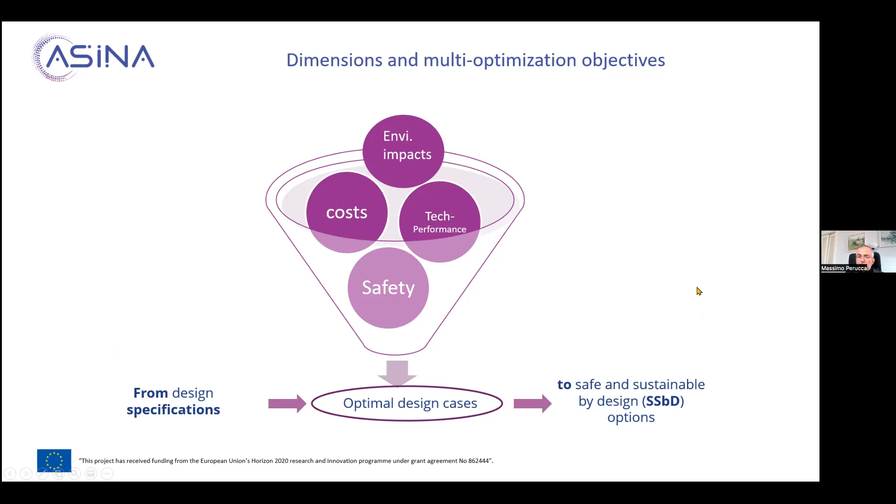As mentioned before, this is a quantitative-based decision support tool, and it addresses 4 dimensions: environmental impacts, costs (economic impacts), technical performance, and safety. By specifying the design requirements through this analysis and through the use of the DST, decision support tool, we are provided with a set of candidate solutions for safe and sustainable by design.

The ASINA Expert System can address different life cycle stages and possibly interconnect different life cycle stages throughout the life cycle of nanomaterials, from synthesis to incorporation, use phase, and end of life options to be considered. For each life cycle stage, a functional system is identified and defined, and within this functional system, key decision factors and key performance indicators are specified in advance, as we will see in a few moments.

So just to give you an overview of the general workflow and which kind of data are generated through the process: we have the life cycle phases. In this picture, we selected one of the possible phases, the incorporation phase, for instance.

This implies the modelization of the incorporation process, and identifying the variables in the recipe and in the processing units that will potentially impact different impact categories, which are related to different dimensions, like the environmental, economic, and safety dimensions.

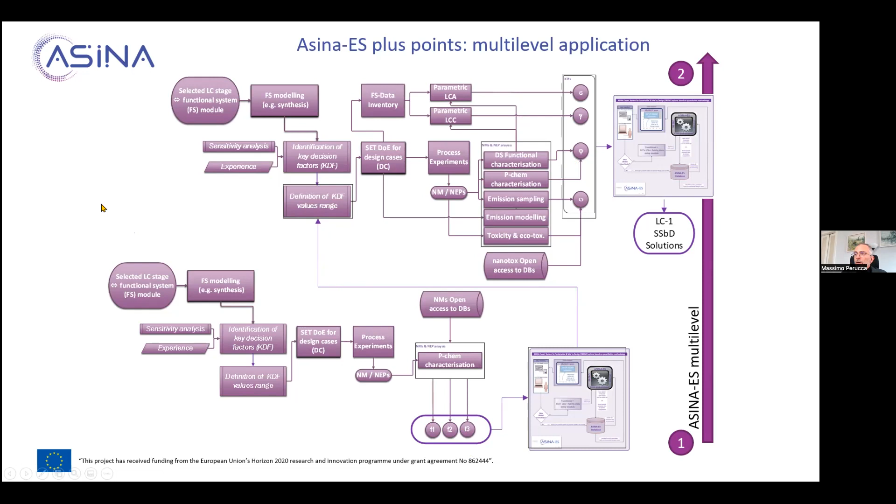And then this KPI here, it becomes a KDF in the next level of the expert system application. And then you can run the process as was detailed before until you get your KPIs.

Okay, this is just to visualize the workflow and to get closer to the final results. So let's recall the experimental data, virtual data provided, which are a reference to the same design of experiment matrix. This is very important to have harmonized data.

Pop it into the ASINA Expert System. What does the ASINA Expert System do? Well, in this simplified 2x2 case, yes, it's 2 KDF cases, you will get some curves in the decision space, which are connected to the performance space, okay?

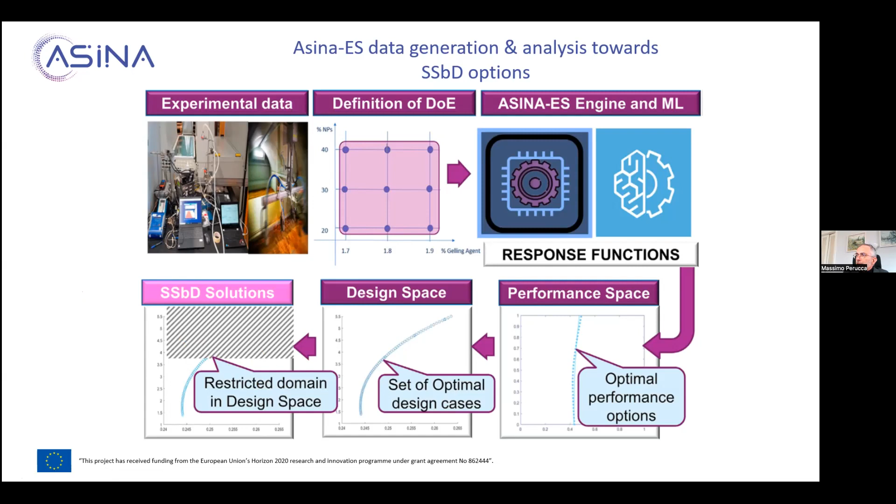And then we will get back to this domain restriction concept, but I don't want to put too many concepts on the table for the moment. Let's step to the second part, which is the main concept of the ASINA Expert System.

So I was referring to the decision space, so the KDF, key decision factors. Within the key decision factor phase, you have a DoE matrix, which allows you to somehow sample the decision space with real values and to get some functional approximation of decision space values.

Then you're measuring the performances of your space, of your samples, for instance, and these are values that are within the objective or performance space. The issue here is to find connections between any point of the decision space and any point of the performance space. Okay, this is quite relevant because,

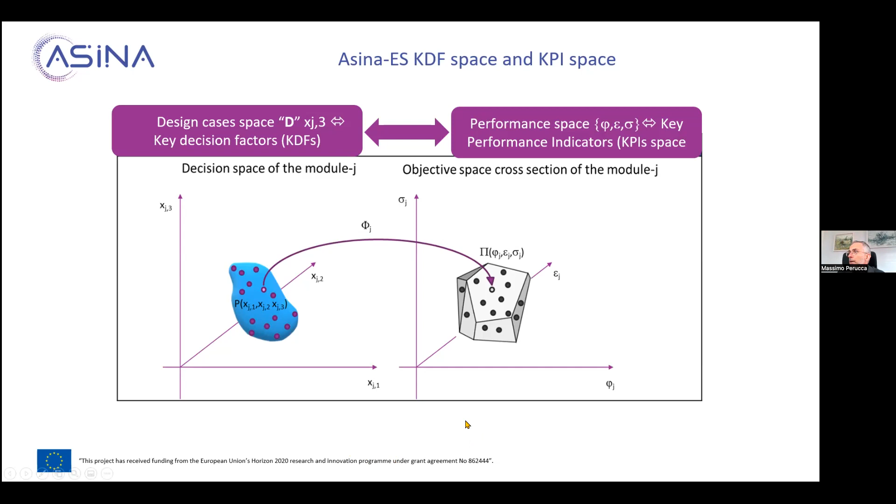by doing so, you can have a lot of information helping in the decision-making process. We will see how in a moment. Okay, I don't want to enter into this workflow, which is a little bit complex, but just want to give

you clear information that the data verification, so the fair data provision, will be an enabling factor to feed data to the ASINA Expert System database. And only by this data could be analyzed. So this is a kind of filtering and harmonization process before, which is somehow necessary in order to assure reliability of the obtained solutions. Let's proceed on that.

Then this slide provides one of the first methodological attempts to address the safety KPIs.

So to somehow assure that whatever will be the selection of the key decision factors, we will end up with a safe solution. This is a nice perspective and methodology, but sometimes it's lacking of metrics and indications in terms of standards. So if we would be able to identify a threshold for the safety level, like cytotoxicity or oxidative stress level, we could say that if we are beyond that threshold, we have to reject any kind of design option. That would be nice, and this was the first attempt to address the safety factors, but sometimes it's not applicable because this threshold is not available, and no one has enough indications to define the threshold level.

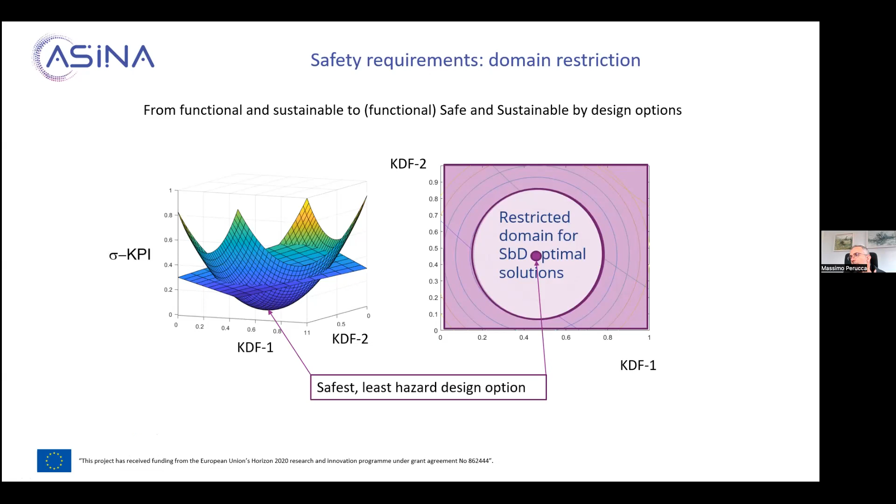May I go on? I think yes, you can go on. Okay, maybe just a note, in case of question you can also write them in the chat and I will read it for you if you need. Thank you, Federica, for monitoring this so that you can stop me anytime, okay?

So let's see briefly the technical workflow, not the data workflow and the data flow, but how to use the ASINA Expert System. So we need, of course, an engine, as we mentioned before. The engine is the implementation of the multi-objective optimization problem algorithm, and you need a user interface, and you need a database to store data, which may be results or input data that you generate from the outer world.

Important to say that when you open your area in the platform, you are allowed to indicate if you are working with a new case study or if you want to recall a previous case study analyzed. A previous case study may be partial, because maybe you just addressed some PChem KPIs without considering any environmental or cost impacts that are now available. So you can also include those data into the case study in order to have a comprehensive analysis of the safe and sustainable by design solutions you want to obtain.

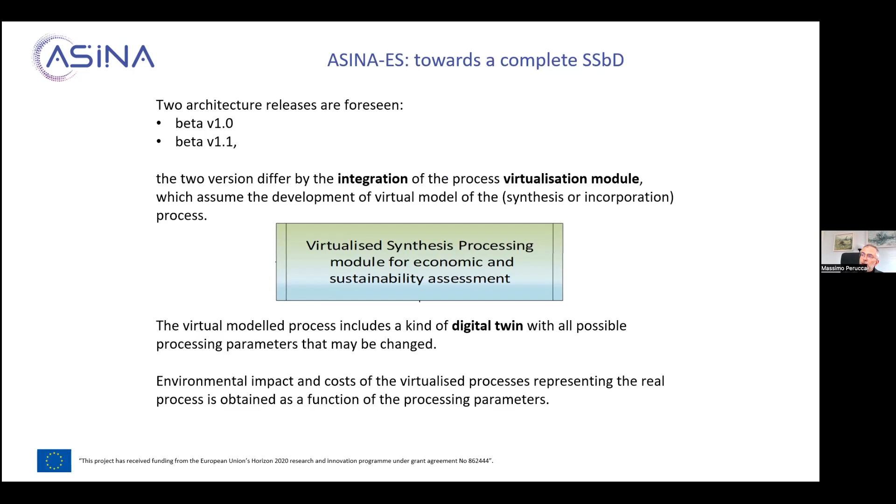So having a system in which, by definition of the functional system and process, whether it is synthesis or incorporation process of any kind, you can specify your design of experiment matrix and obtain sustainability, economic and environmental sustainability outcomes in terms of KPIs. And this is attained by, of course, running the standard lifecycle costing and lifecycle assessment analysis.

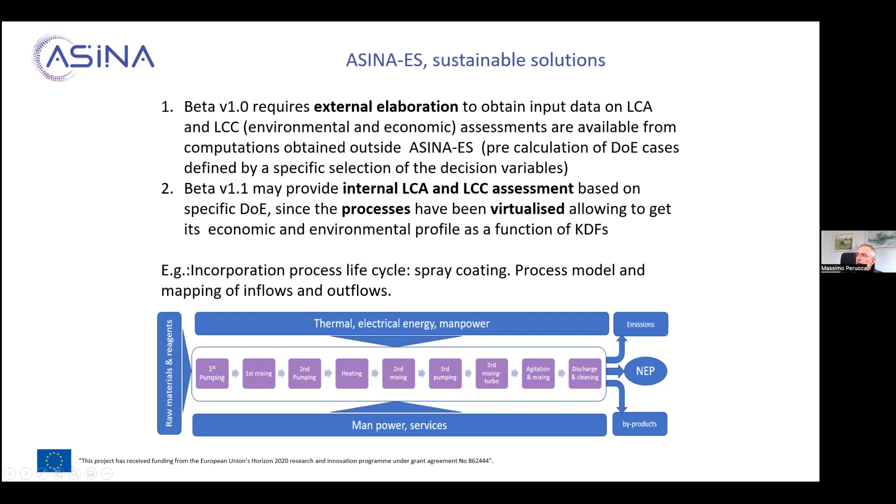Through the process itself, so here we provided an example of the different steps that are implied in a process, which is a process applied in cosmetic nanomaterials incorporation. All sampling of the process is done, and recipe parameters are input into the design of experiment matrix, and you can get the LCA and LCC process through a virtualized analysis.

This is the workflow of the ASINA Expert System in detail. As we were commenting in the first version, we had the virtualized synthesis external to the ASINA Expert System. And then we could select as a first step when recalling the ASINA Expert System which kind of situation we are in.

The situation is defined by the amount of key decision factors and amount of key performance indicators we want to consider. Then we have the input module, which will allow us to input data either by popping data in one by one or by uploading through a template.

Then we have a pre-normalization module. We generate the response function and we normalize again. And then we run the kernel, so the multi-criteria decision analysis task, which is the multi-objective optimization problem solving.

And we are able to interconnect decision and performance spaces and run the back conversion module, which allows us to start from the performance levels. This module allows us to get the key decision factors connected to those performances we want to address as safe and sustainable by design cases.

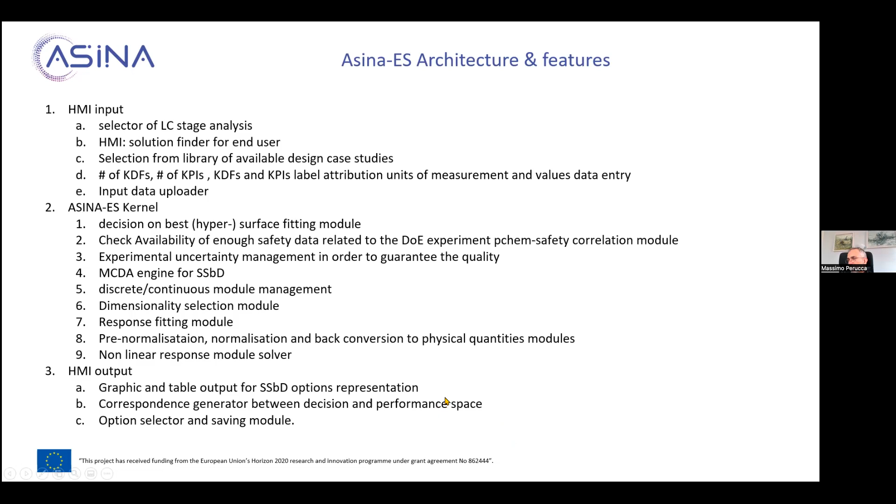Then we have graphic outputs, and we have some options in selection and saving modes of data, like a table mode or graphic mode, and we have outputs to be printed.

This is the first page in the platform that you are shown when starting an analysis, and you see that you can select synthesis, use, and incorporation or end-of-life solutions. So the use case definition - you can recall available use cases, you can define a new case study, etc.

This is - but I don't spend too much time on this - you will see it in the movie.

This is the new interface that we recently developed for data input, in which you see here 2 columns related to 2 KDF and 2 columns for the 2 KPIs, just to simplify and exemplify the situation.

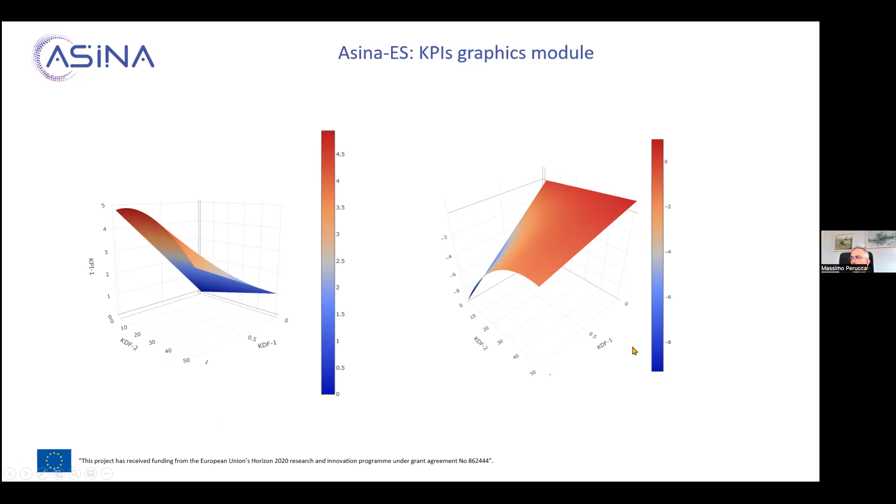And these are the kind of outputs that you are able to obtain after the ASINA Expert System interpolation model produces them. So you have a visual output on how things go when you are selecting some values of the KDF for different, of course, KPIs.

I think we can go through a user experience. I would like to show you a movie that will visualize better what I was trying to explain in a more technical language. Is there any questions so far before starting with this part?

No, I see that Federica is not stopping me, so let me try to make the movie link work. Okay, I have to move, sorry. Did you see it here?

Yes, okay great. So this is the first screen to log into the platform, and then we cut the movie, of course it was too long. This is the list of available analysis. You define a case name, the design case description, and textual data.

You of course have to provide the date of the analysis, and you can work with different variables. In this case we have 2 or 3 variables as a selection per case. These are the KDF, which I was mentioning before, and you may have different key performance indicators. Now we show up to 5, but it's basically an indefinite number of KPIs we can have.

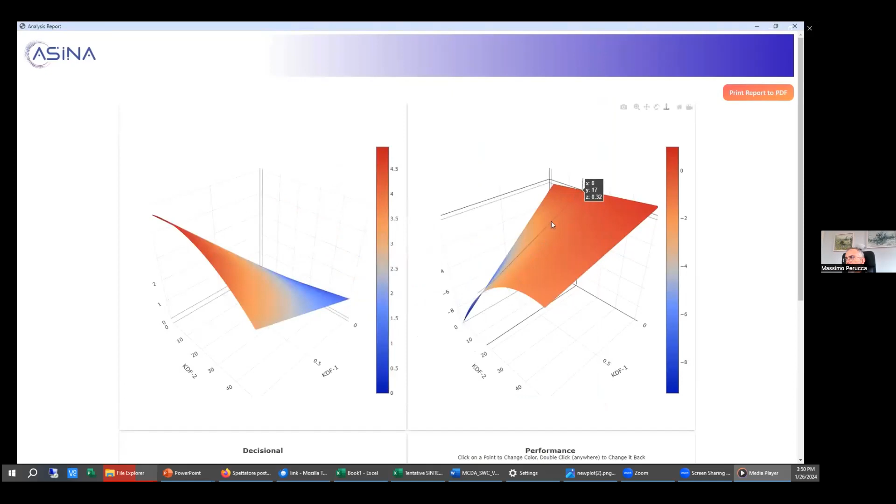You see here that, yeah, this was a screenshot, so you can use this for reporting, for instance - it's quite useful. And the same is for the second KPI shown.

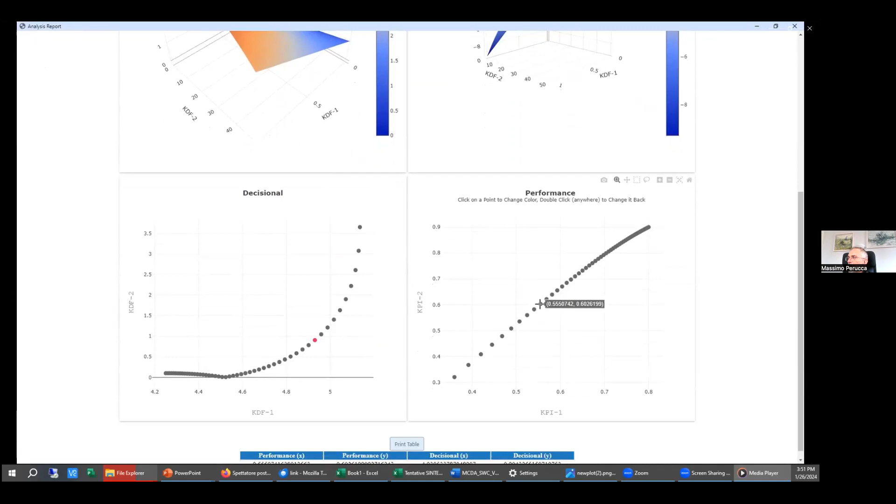But here, look at this - now the decision maker selects one point. This is interesting for KPI 1 and 2, and you see that the red point was found. These are the interconnections.

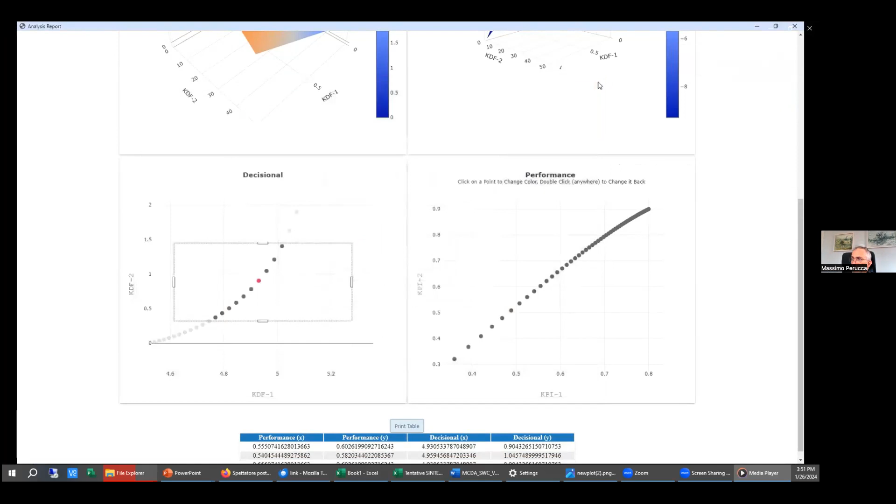So the closest point provides the KDFs, which will provide you the decisional values, defined as X and Y. So you have a table. By selecting points in the performance space, you will be given back the recipe of the synthesis or incorporation process you need to perform to get the expected key performances. The decision maker investigates the space and makes considerations by maximizing or accepting levels of KPIs which are compliant with the design specifications.

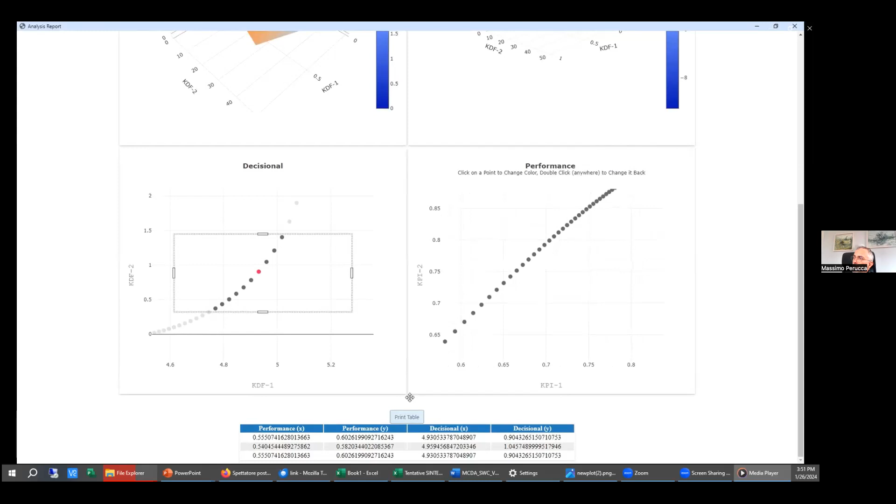What I was mentioning before, if you imagine KPI number 2 as a safety parameter, if you have a threshold that identifies the level which you cannot exceed, that could be the right information on what are the viable safe-by-design cases the decision maker can select. But most of the times this threshold is not available, so the decision maker has to minimize as much as possible these safety impacts.

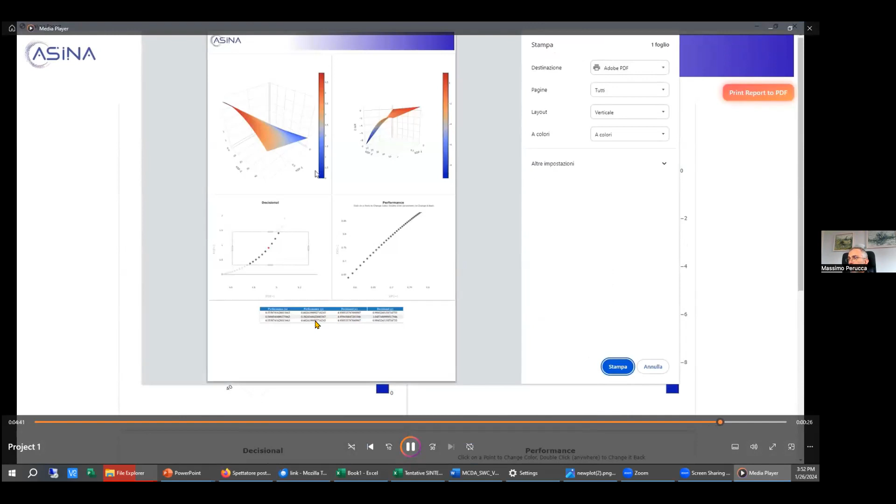You can print a report after making your analysis, and you have here the table of the selected points and the KPIs shown in detail. This is the value, and you can either select table mode or graphic mode to have a printout. This is just for user experience.

So now I want to show you, if possible, another movie. Let me check if I'm able to find it. It was a quite fresh movie, so I'm looking at it for the first time as well. Let me check. Should be here, sorry, I have many screens open, I have to navigate in this messy monitor. Oh, here it is, it was hidden. So I have another movie here. Let's see. No, this is the old one, sorry. Maybe this is the one. Oh, I don't know which one. Sorry, I have to go a bit further. No, it was the right one. Sorry. Yeah, it should be the right one. So I skipped the first part.

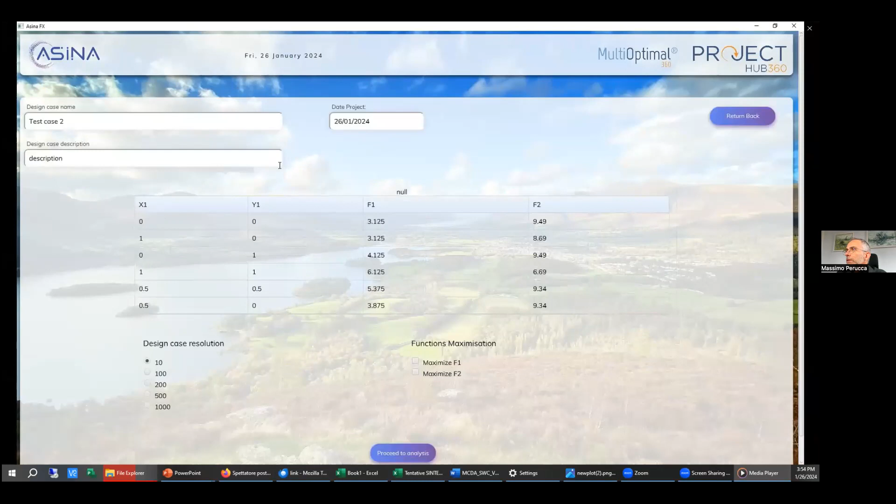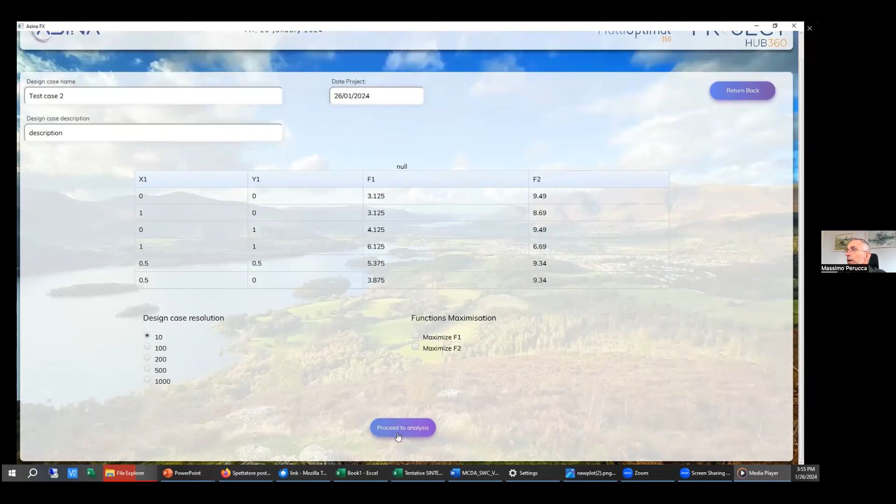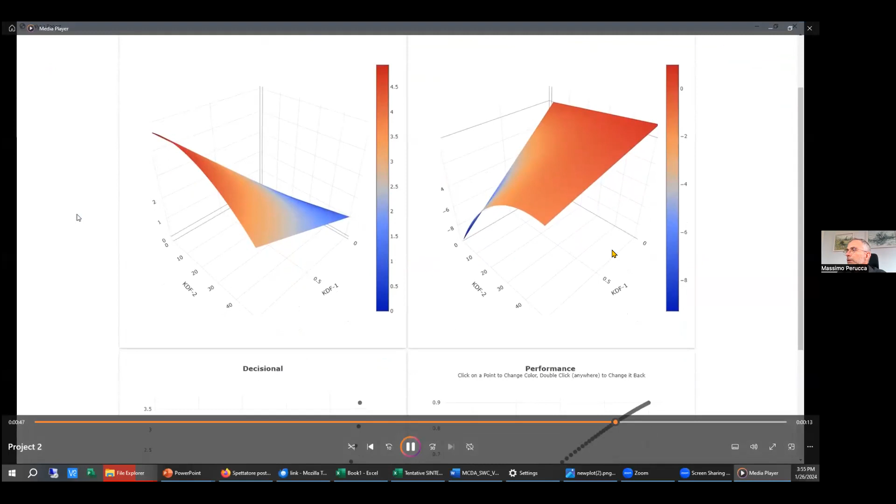This is the loading of cases, some modification of data, for instance. They change some values. This can be due to new experimental work or finding new average values, which are derived by more replica in the same experiment, and you are obtaining the results.

Okay, this is just to show you how it works in terms of collection of new data. Okay, let's move here. So we can now look at some case studies. Are we on time? Federica, how much time do we have here? We have still, I think, half an hour.

Okay, great. So at least a few cases we can share as case studies that have been studied within the ASINA project and with the ASINA Expert System in its different evolution stages. ASINA Expert System is addressing two value chains, mainly impacting different industrial applications, like photocatalytic filters for the first value chain - illumination systems and coated textiles with antimicrobial and depolluting properties. The second value chain is cosmetic applications, with anti-aging and antibacterial skincare products to be developed by active nano capsules.

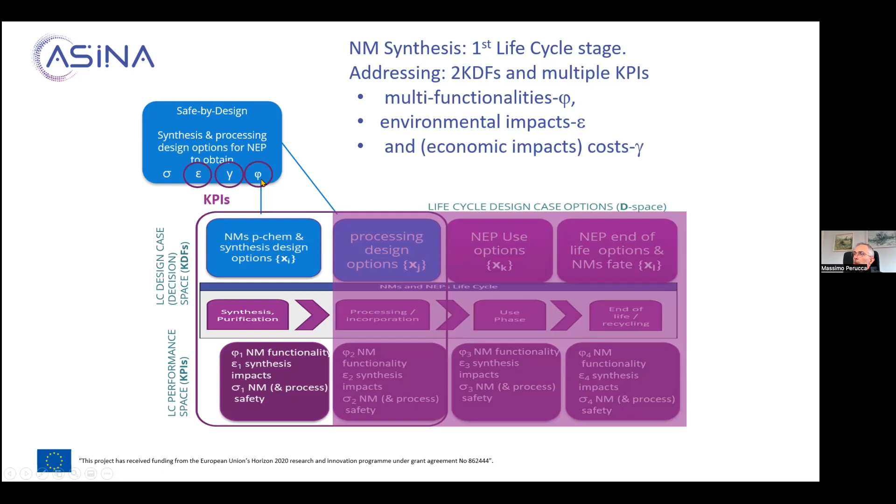Recalling the previous slides, in this case study we addressed environmental, economic, and functional key performance indicators. We considered two key decision factors and multiple key performance indicators within these three dimensions: environment, cost/economic, and functional. Sorry, I had to shield data for confidentiality reasons, because these are consortium data, but since we are not seeing numbers, this still provides you the clear vision of what has been done.

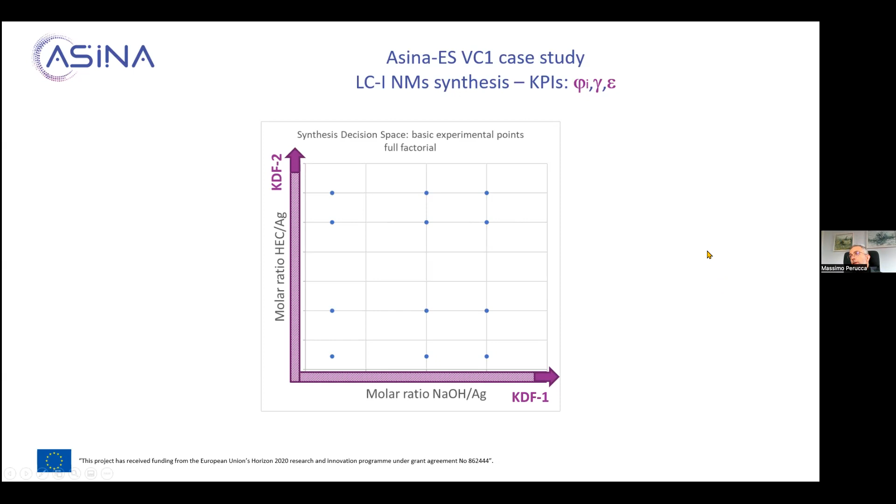We selected, with synthesis experts, these two key decision factors: the sodium hydroxide versus silver ratio, or weight, and the molar ratio of hydroxyethyl cellulose versus silver, as the two main synthesis parameters. The synthesizers were CNR, former ISTEC department and division, and they have synthesized those materials for quite a while, so they were very knowledgeable of the synthesis, and they wanted to investigate systematically the synthesis formulation to test against different key performance indicators, which were the PChem - physical-chemical - characteristics of the nanoparticle.

Well, here we have key decision - sorry, you see here KDFs, but those are KPIs. Sorry for the mistype, all those are KPIs.

So you see that we have multiple KPIs: 1 through 11 KPIs belonging to different dimensions. The first set is of physical-chemical KPIs related to the synthesis process and nanomaterials functionalities. Then we have economic KPIs of the process and its inherent environmental impact, based on the specific selection of the two key decision factors.

Just for instance, if we look at the first point, which defines the first levels of sodium hydroxide, silver, and hydroxyethyl cellulose versus silver ratio, you will end up with specific carbon footprint data related to CO2 emissions, and with specific cost per unit batch produced, in connection to the specific physical, chemical, and antibacterial activities against E. coli and Staphylococcus aureus measured.

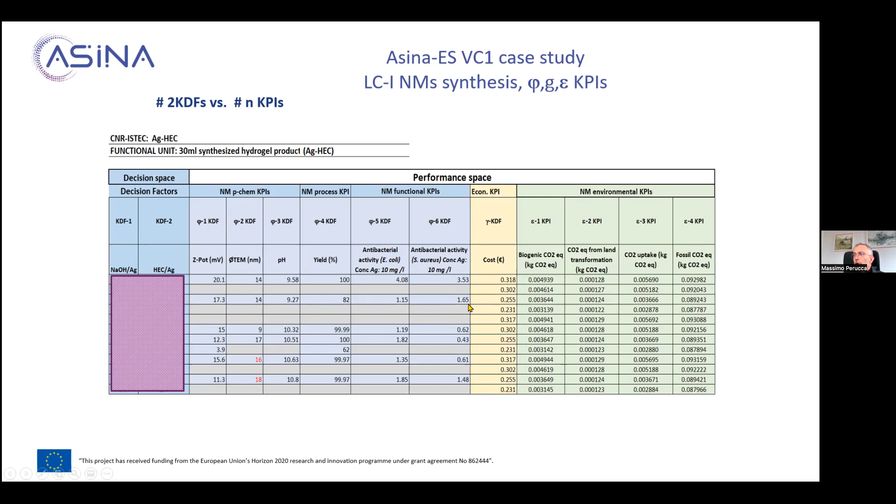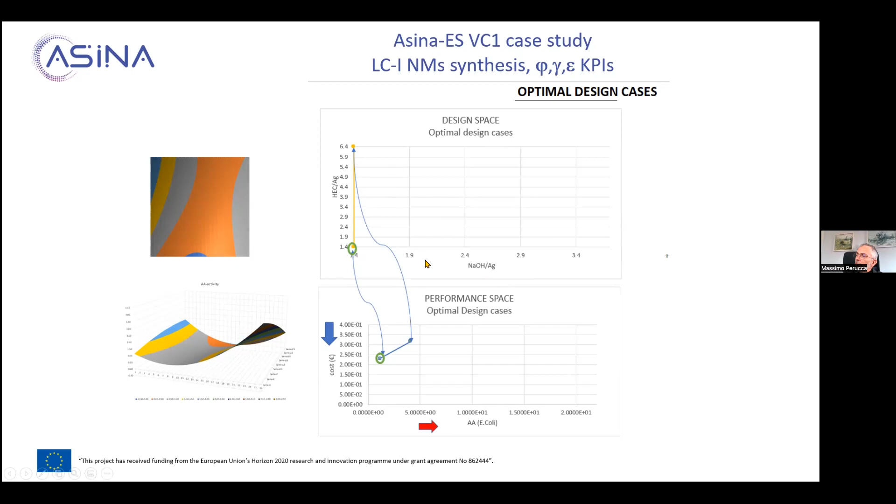You can display this information out of the multidimensional space, which we cannot show as a diagram here, so we have to make projections on 2D spaces, showing the behavior of the system in terms of changing the selection. So here you have a different interconnection of the spaces analysis.

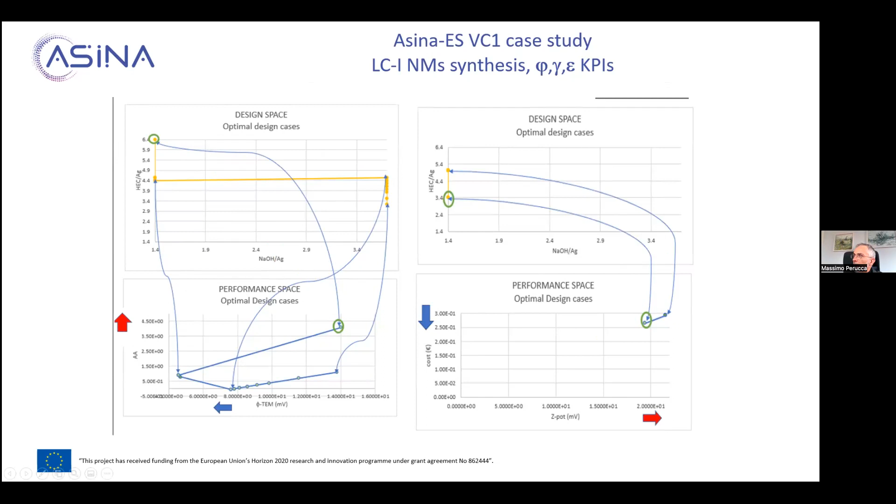This, of course, implied a little bit of work in order to find correspondences and to see where we were and to see what was the best solution to be applied. We don't enter into more detail, but there was a solution within the upper left corner, which was finally selected as the best, safe, and sustainable by design.

Silver Ag nanoparticles to be further used in incorporation processes. Here we are addressing the incorporation phase. In this perspective, you see that it's a stage gate analysis. So you first find out the best solution in terms of synthesis, then we want to address the best solution in terms of incorporation process.

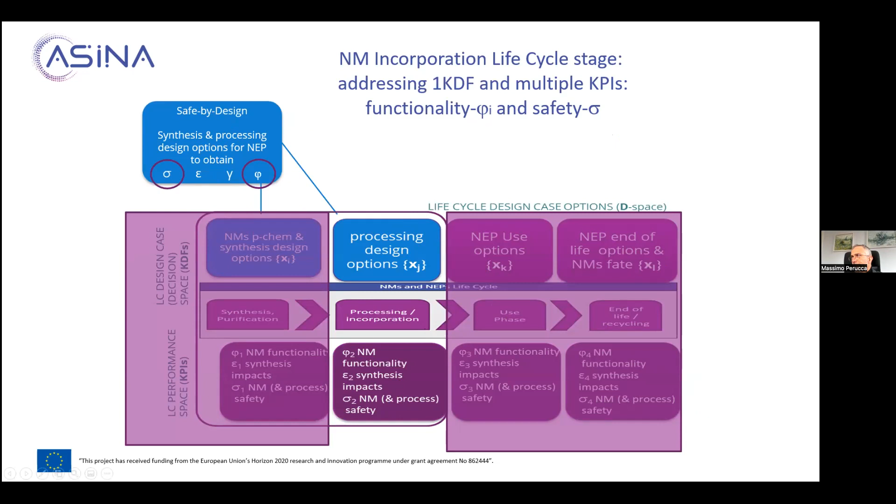Let's see what we worked out. I'm just checking the time. So in this case, we are addressing incorporation, and the two KPIs are the functionality and the safety index of the incorporation process.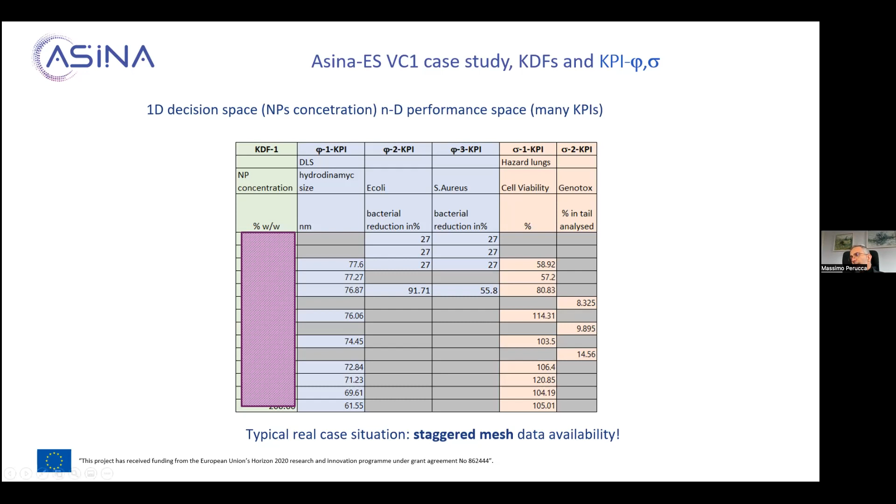So you need to somehow harmonize and make a curation of data in order to enable their use in the ASINA Expert System analysis. That's what has been done, and this allows us to provide quite good interpolation of available data and extrapolation as well.

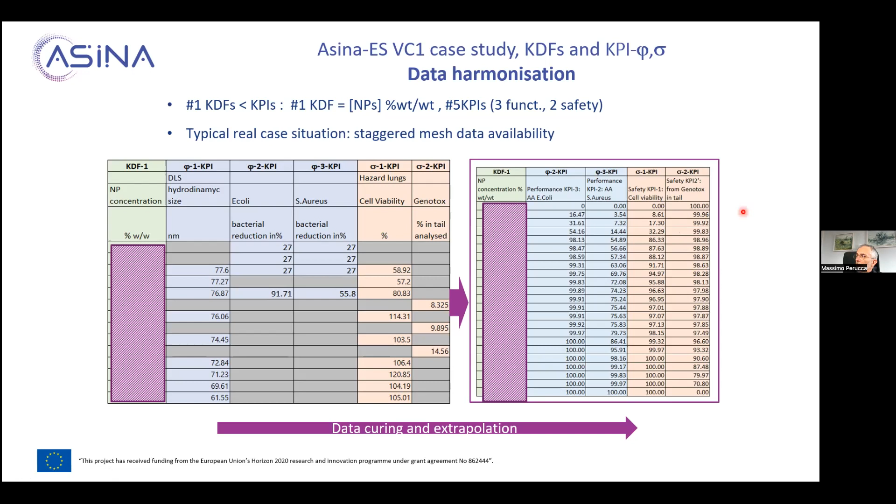We have to see here the performance indicators, which are more than two. So we have two performance indicators for the functionality, the efficiency against E. coli and Staphylococcus aureus, and cell viability and genotoxicity in tail tests. We found out here, this is a sketch of the results.

Well, this was 1 kDF, the concentration of nanoparticles into the solution to be further used for spray coating activity. And as you can imagine, the performance of the system was increasing by increasing the concentration of nanoparticles. Here as a safety measure, you see the cell viability, and you have a second safety performance here.

Which is providing an opposite trend. This is the interesting case to deal with, because if everything is aligned more or less, you point for the highest value and then you are done. You don't need an expert system, you don't need analysis, everything is easy. But most of the time, the real world provides us complex situations to deal with.

And in this case, we have to identify the trade-off. So what could be acceptable? Well, in this case, we provided here the projections of different performances which are related to the key decision factors. This is to sketch that we found out that the best solution was that one, which I cannot tell in terms of ppm concentration, but it's a number obtained, and as you can see, was somehow contained in this range.

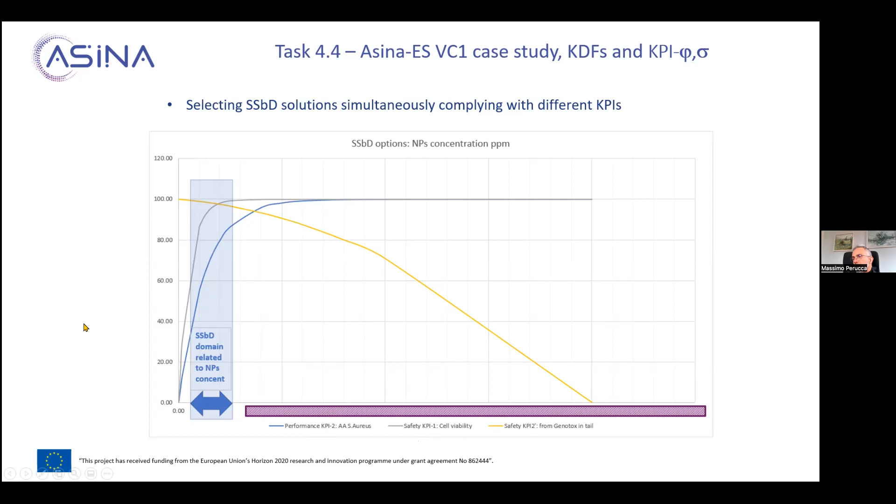Okay, this range was the good range of safe and sustainable by design candidate solutions. You see here in terms of normalized data, those numbers in the y-axis are not referable to quantities, except for cell viabilities, which are expressed in percentage, but the performances and other KPIs are in arbitrary units. But this provides you the trend.

Okay, so the other case study is related to value chain 1, still for the incorporation phase, and this is the real application of nanoparticle suspension onto the fabric, to obtain really coated textiles.

So second phase, what are the KPIs and key decision factors? Here we have 3 KDFs and well, it should be 3 KPIs as well... sorry, this is typo, we are addressing functionality - no, we are taking into consideration all of them. It's correct, so 3 KDFs and 4 KPIs: functionality, environmental impacts, cost of the incorporation process, and safety level of the process.

The safety level has been addressed, I want to highlight, not in terms of nano safety, which was already addressed in the previous synthesis and solution incorporation process, but the safety in terms of human toxicity potential derived by the incorporation process itself. So here I want to highlight that we are considering some safety parameters as part of the standard LCA assessment impact categories, and none of them are related to inherently nano toxicity or nano effects on human or environment. That's the limiting point of ASINA at this step of development, which is basically the state of the art in safe and sustainable by design at the moment.

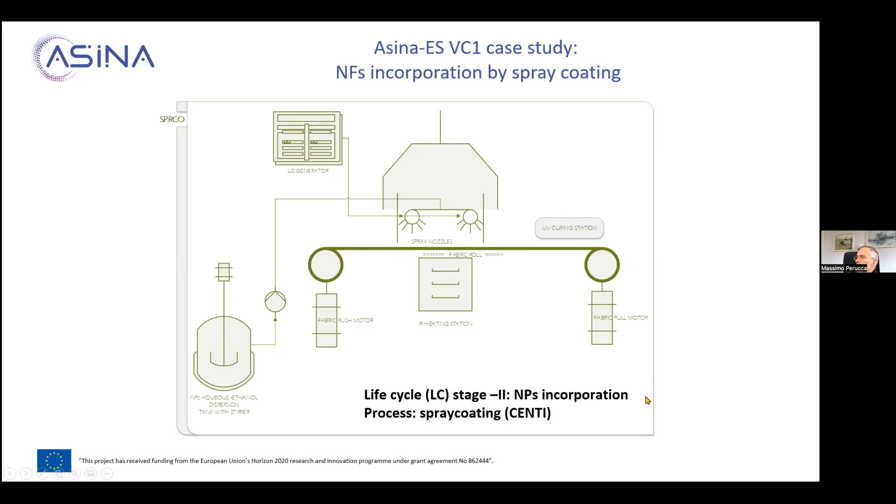But this will be pushed forward in further scientific activities. This is the sketch, the functional system schematics of the process, in which we have the aqueous ethanol dispersion - this was the one considered before. And then the pumping system, the guns that are able to spray on a roll-to-roll system, carrying out fabrics, which was on this tape and moved through the coating volume. This activity has been performed by our CENTI partner in Portugal.

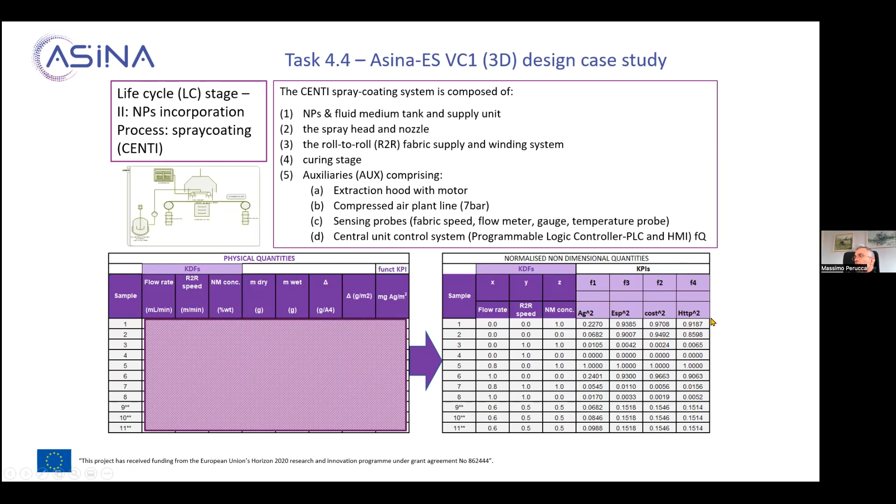Still, we cannot disclose the values of the flow rates, the roll-to-roll speed, and nanoparticles concentration in the solution. Here you see the 3 KDFs I was addressing, and then we have these 4 KPIs in terms of silver nanoparticles deposited on the fabric, and the environmental impact indicator, which was obtained as a synthesis of the whole LCA impact categories, apart from the human toxicity potential, which was considered separately in this analysis to address specifically and explicitly the safety level of the process.

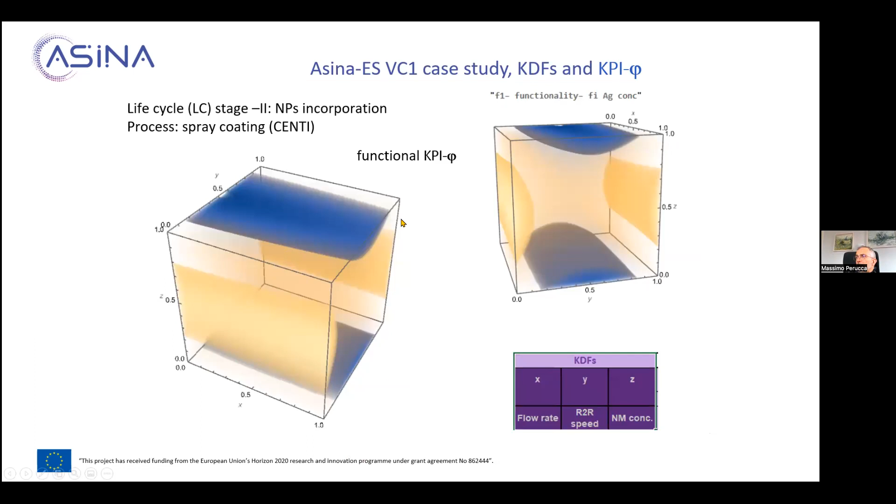And so we end up here with the analysis of the three-dimensional outcomes in terms of X, Y, and Z. So you can recall the KDFs here - X, Y, and Z are flow rate, roll-to-roll speed, and nanoparticles concentration. And here you have the KPIs, and the KPIs provide in the performance space the outcomes.

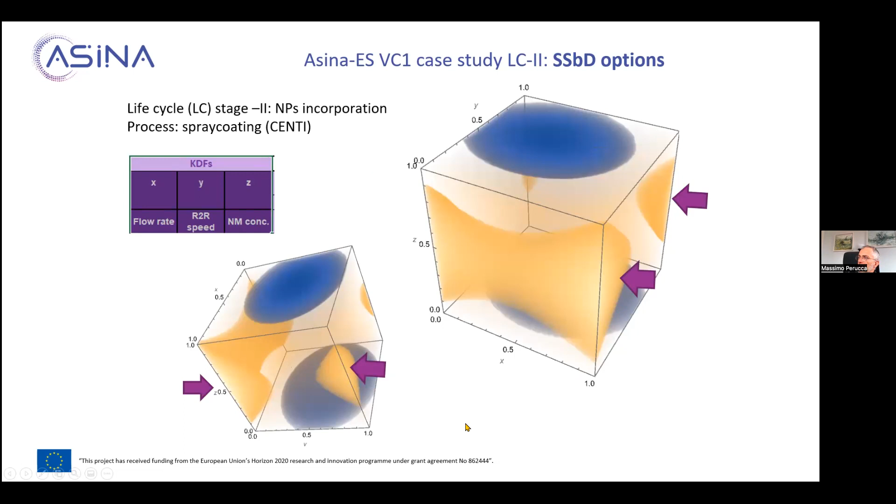And since you want to maximize the KPIs, then you're able and free to select among the yellow color areas, which in the color scale provide the highest values. So yellow is hotter than blue, and then of course you are addressing these points. And the ASINA Expert System provides you which point in the key performance indicator space is related to the KDF. So this allowed us to identify the best options, the best safe and sustainable design incorporation processes.

If we still have time, we can address the second value chain of the ASINA Expert System, one of the cases analyzed, and this was the incorporation of nanocapsules. The synthesis of nanocapsules was already analyzed in terms of sustainability and safety, and a specific nanocapsules formulation has been selected for the incorporation process, which is a turbo-emulsification process.

Here I want to provide you this case study because this is a typical approach in which we can somehow optimize the stage-gate use of the ASINA Expert System, because during the project development we had a limited amount of experimental cases to be performed due to time constraints, cost of each test, and duration of each test. So we wouldn't have been able to get all the full factorial experimental tests during the project timeline, so we had to design in advance.

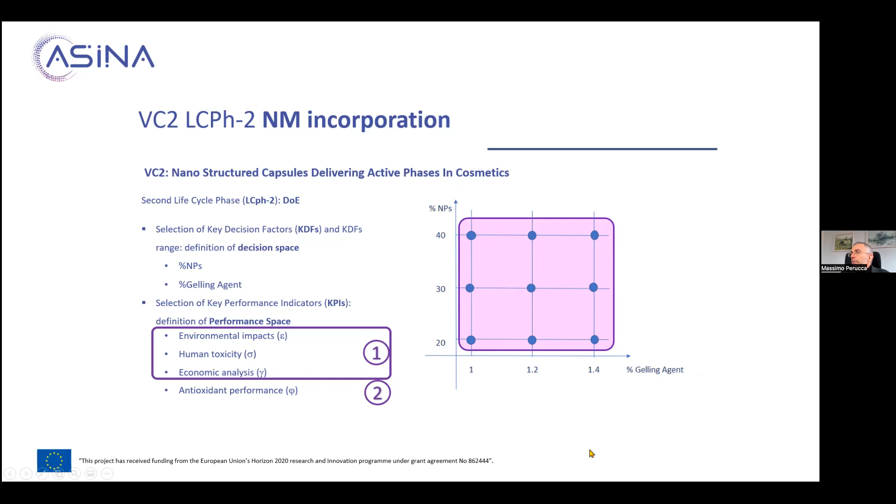This was done for different nanocapsules containing different active agents that were previously selected, and the analysis was done in virtual design and experiment mode to identify the best cases. We selected here, in this case, the coenzyme Q10 with vitamin E. Those are the points in the design of experiments, which span the concentration of gelling agent and nanoparticles concentration as possibilities in the real formulation.

Now we are addressing the incorporation phase, and the KPIs OPEX—the operational cost of the process—and environmental impacts. We found values related to the two formulations, and we see that the environmental impacts, in normalized terms, are minimal when using minimal nanoparticle concentration. But we learn that the amount of gelling agent doesn't play a big role here. It's a non-linear response, as we know from detailed analysis of the output data, but we see a low dependence on gelling agent. This could be one of the screening activities done to select the KDFs relevant for the analysis.

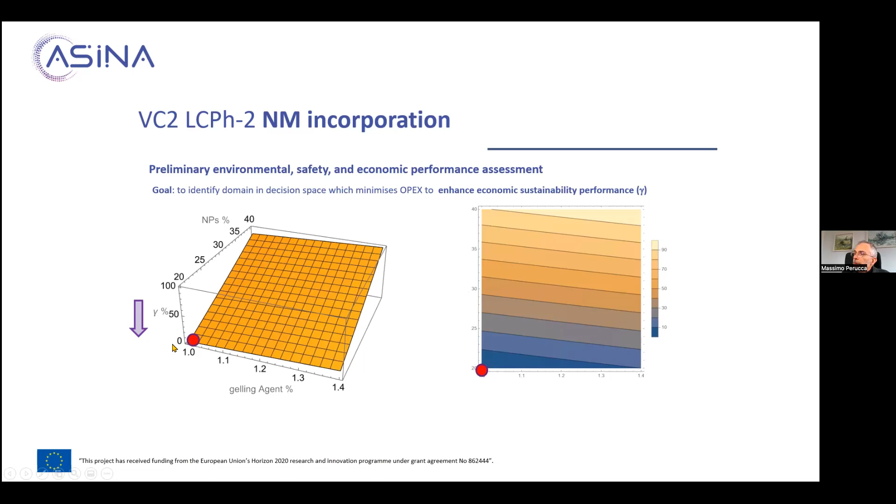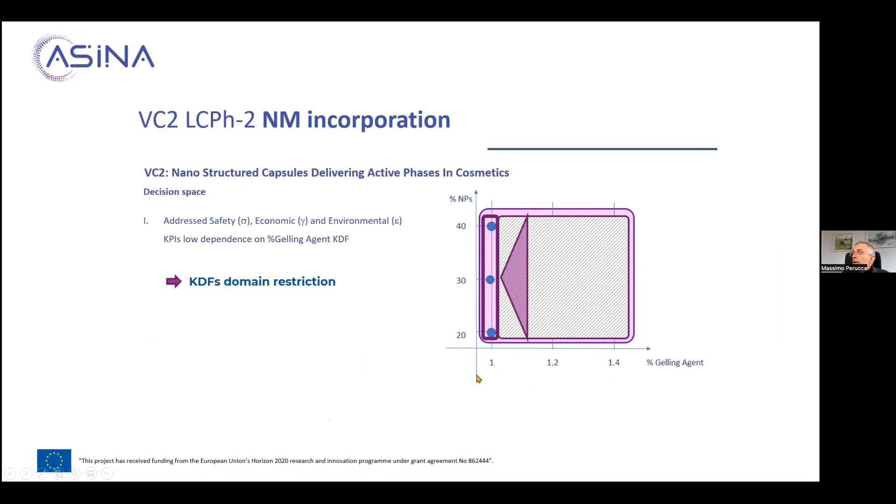This was the same for the safety parameter in terms of human toxicity, and also related to the cost factor. These are slightly different responses, but somehow aligned in trend, so it's not difficult to find the best solution. Importantly, this analysis allowed us to restrict the dimensionality of the decision space to one dimension, and see what the nanoparticle concentration effect could be on the other key performance indicators—functionality and

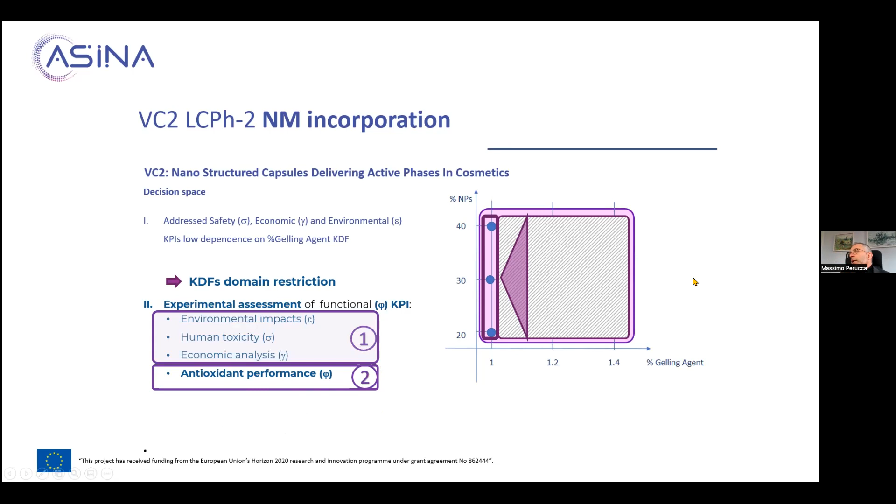nanotoxicity effects. Antioxidant performance was addressed in the second step of the analysis by defining a limited amount of real samples to be produced by the Redoview company in the incorporation process. And here are the results.

Maybe it's not so clear, but I want to show you that we have in blue the environmental parameter, the cost parameter in orange, yellow is the safety, and in green up here is the functionality level. The scales are not the same for all of them, but we can see that within this interval of concentrations, we can work quite easily, because all the environmental and safety performances are really providing good solutions. So we are minimizing cost and environmental hazard for these products, but we are already at a maximum level of performance in this range.

That is a typical case where, from an industrial point of view, I can cope with 90% functionality instead of the optimum functionality achievable with the maximum concentration within the KDF range. Still, if I restrict myself to this range of 20-22 concentration of active agents, I'll be fine, because the functionality is there, and we get the minimal impact.

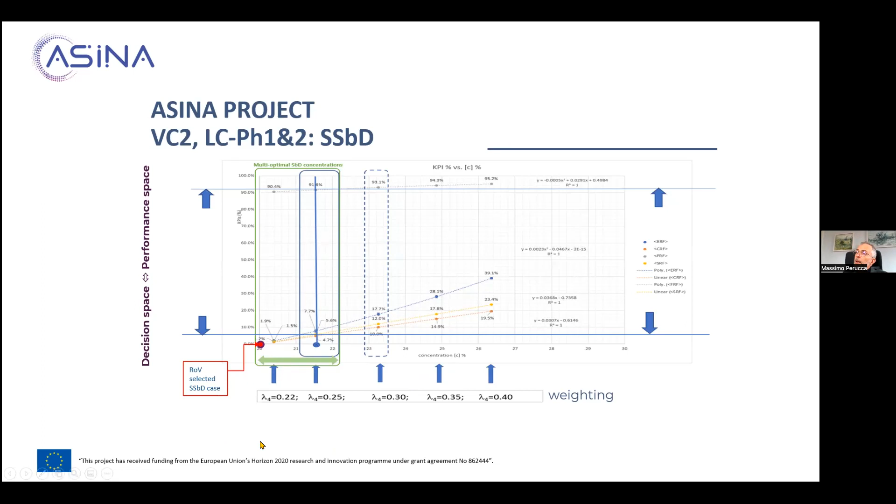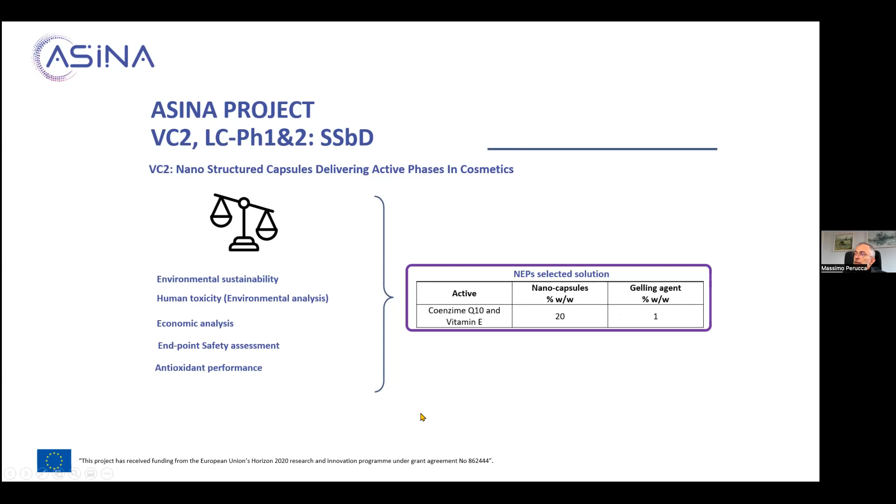Finally, Redoview selected really the best of the best in terms of safety, because there were also other meta criteria to be met, which meant that if we reduced the concentration of active agents, there was more freedom to play with other ingredients like fragrances and so on. This allowed them to have better customization of the product in terms of regionality of application. So here was the final selected case, and this was quite interesting as a solution.

So we got what we were really aiming at. Final considerations, which are general, but I think relevant for the ASINA Expert System. Getting back to the tool itself, which supports all this decision-making process within ASINA, also with the help of experts, which can be included in the process. So it's quite relevant—a human-centric approach, I want to stress this point.

Expected impacts of ASINA Expert System. This is really at the beginning phases of this journey, I think. There is still a lot to do, but we can already envisage some relevant impacts in terms of technological industrial processes at all levels, not only the nano-specific case, but also in conventional processes to address safe and sustainable by design solutions using safe chemicals, scientific research.

Also, when scientists are synthesizing new materials, new nanomaterials, new chemicals, they may be supported in this phase in order to reduce their time for development. And this may also be useful for generating data. The shorter the time for research and development, the higher the number of data available per unit time. So this is a very interesting fact.

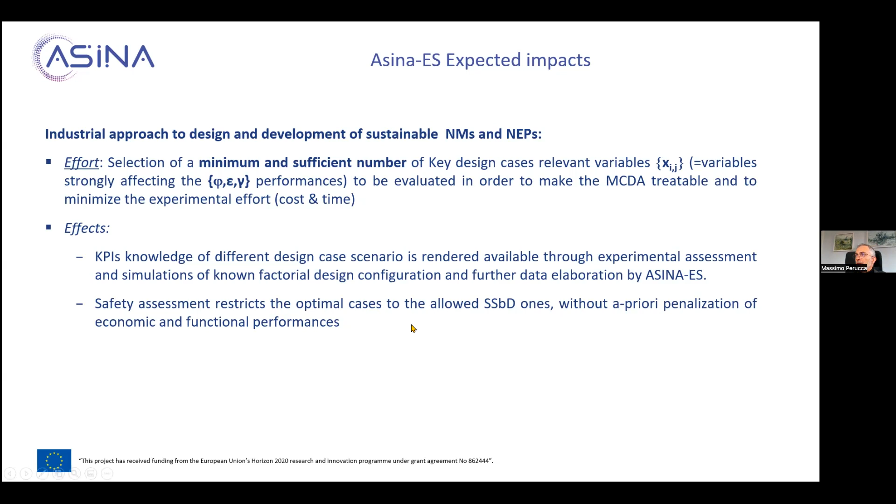So what could be the best synthesis or incorporation or use phase protocol, or end-of-life options, strategies and solutions. The effect is to get knowledge of different design cases and to have a safety assessment which restricts the optimal cases to the allowed safe and sustainable by design one. So the points that we have seen in the movie are those restricted optimal candidate cases that the designer will select in the end. And this is a fast process.

What are the requirements? The ASINA Expert System doesn't work by itself. It's not magic, it's something real. So it has to comply with time, with cost, with resources, but at least you need to generate data—a minimal amount, but still a sufficient amount. You have to rely on experience in order to select the right number and type of key decision factors, and the range of the key decision factors.

You need to virtualize—create a digital twin, some virtualization of processes—in order to enable full factorial design of experiment analysis in terms of life cycle assessment, life cycle costing, and maybe social life cycle assessment as well, if you want to address another dimension in sustainability. Then running dedicated experimental characterization campaigns, this you cannot avoid if you want to work with primary data which are reliable, so you need replicas also.

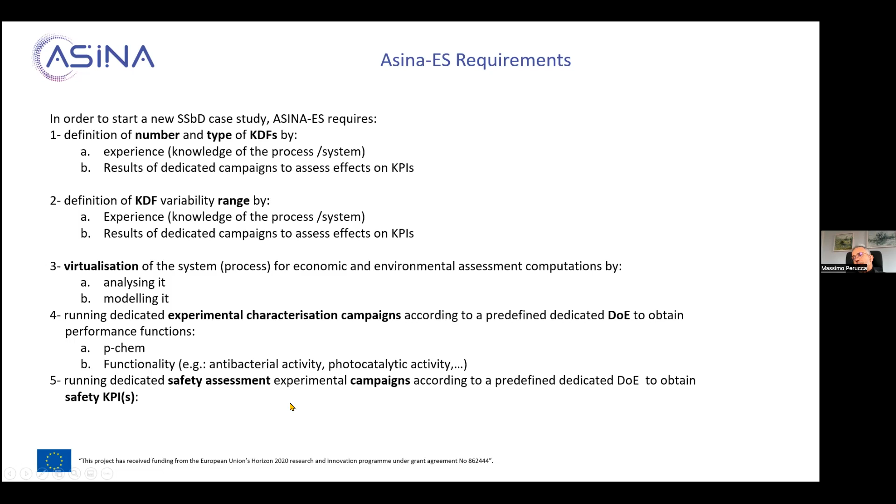This allows you to also measure the physical chemical characteristics of your nanomaterials and the functionality that can display. This allows us also to interconnect the p-chem and the safety and functionality levels of the final solution we are obtaining. Then running dedicated safety assessment and campaigns—like viability test, oxidative stress, DNA damage, and whatever applicable test for the specific material and application. This has to be done, so selection of test is also a relevant point in the requirements.

And then limitations. The selection of KDF variation range has to be the right one, otherwise we are investigating the wrong domain in the decision factor space. We have to have conscience and be clear in mind about what we are doing. If the variability of the range within the decision domain is minimal, too small, then we won't find any relevant change in the KPIs, and so we cannot discriminate sample from samples. This also has to be devised in a clever way.

On the opposite, if the variability of the KDFs is too large, then we will get too coarse a mesh in terms of sampling of what's going on in the decision space. So we need more and more data, or we have to select a better KDF range. This has to be done based on human experience, or relying on previously acquired experimental data.

Other limitations: how to handle them? The selection of the KDF's variation range has to be the right one. Maybe running a preliminary multifactorial DOE in order to get a feeling of what's going on, in order to get the refined DOE for final testing in all dimensions, and then identify the suitable KDF. KDF variability is key in this early stage phase. Then possibly a finer mesh may be required, meaning more data in terms of experimental data or virtual design of experiment in terms of modeling.

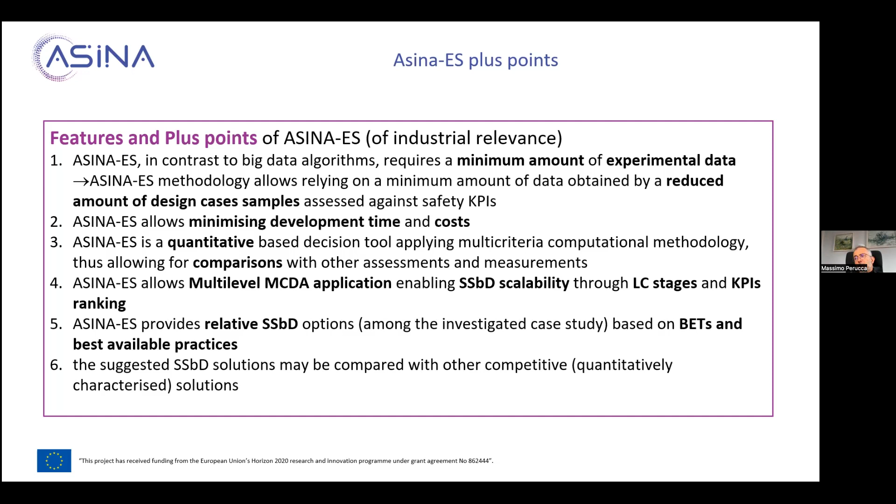So we are also always able to refer to external benchmarks in terms of products available or nanomaterials already synthesized by big groups like Degussa or whoever is providing nanomaterials for the industrial world. The suggested SSbD solutions may be compared with other solutions, as said before.

Very important to say that this is a scientific implication: when we are able to deal with the physical-chemical data, this could be considered not as KPIs, but as KDF - key decision factors - that are somehow connected to the key performance indicators in terms of safety or sustainability. So by addressing specific sizes or physical-chemical properties of the nanomaterials, we are somehow implying specific outcomes in terms of safety levels or hazard.

Sensitivity can be controlled by the ASINA Expert System through uncertainty propagation, which includes numerical uncertainty propagation and experimental uncertainty. So we are able to control the outcomes of the solutions, which also may turn into no information. As I was mentioning before, if the discrimination between different samples in terms of KPIs is too small with respect to the uncertainties of each sample, then we cannot provide any answer. So this is also a guideline in order to identify the KDF range better.

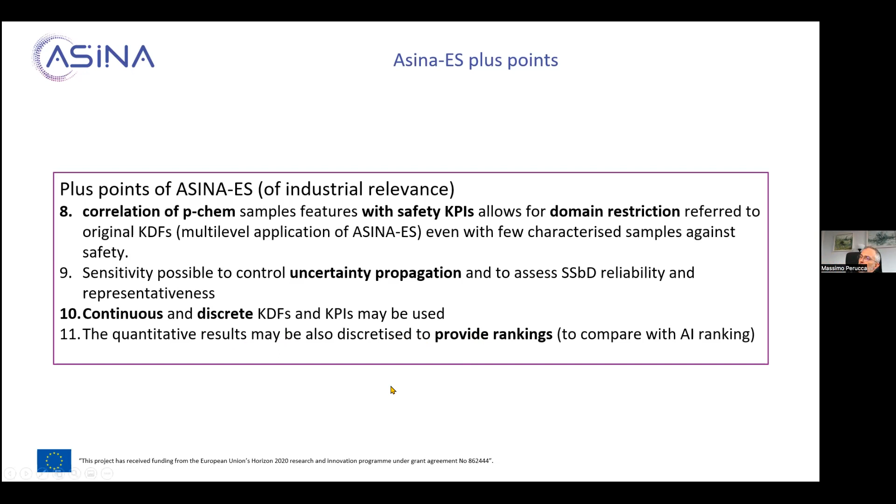The quantitative results may also be discretized to provide rankings, so we don't necessarily need to provide numbers in the end. We can provide values which could be viable, critical, or not applicable, by defining some ranges within the continuous values obtained by the key performance indicators.

I'm almost close to the end. We make simultaneous comparisons of different performances. This simultaneity is very important because it allows you to avoid the weighting of the KPIs - deciding which indicator, which performance, is more important than others, you can decide in the end. Most processes require you to cut off some options at the beginning because you are selecting some KPIs as more important than others.

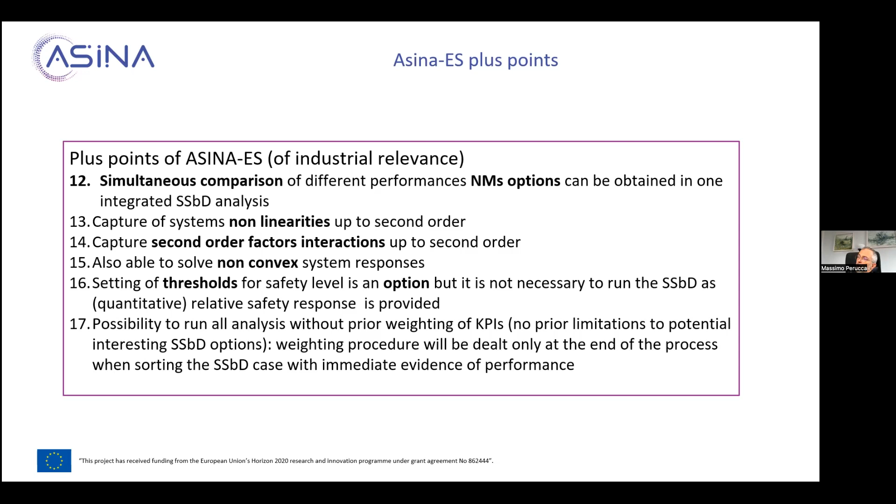The response functions that I will show you for the cosmetic application, it's a typical example. So this was also applicable. If available, we are able to set thresholds and options to the design, technical specification and safety specification of our design case study. And the weighting procedure at the end is quite a novel solution.

So, okay, I think that if you have some question, I think that this now is the moment. In the chat, there are no questions. So I don't know if you have time, if you want to ask something, now is the time. Anyway, we can just say hello to everybody. Maybe we can wait for some moment.

And anyway, thank you, Massimo. It was too long, maybe talked too much and left a few space for questions. Sorry about that. No, I was trying to rush a bit because it's so many slides.